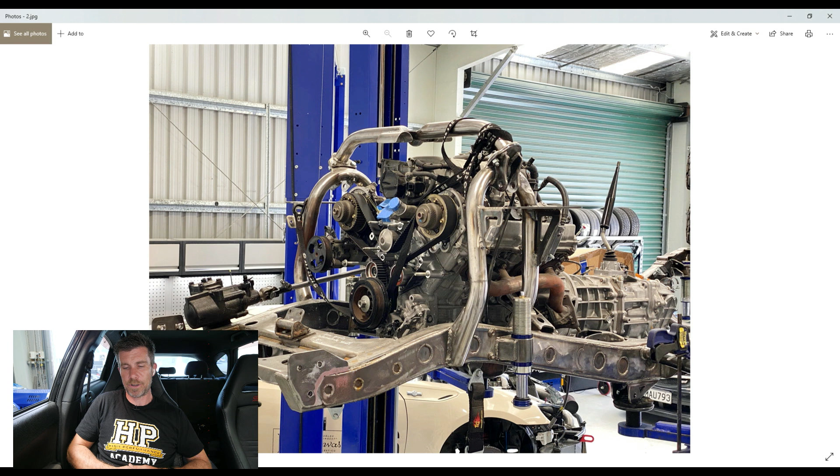As part of that, the upgrades include modernized suspension, including coilover suspension on all four corners, disc brakes, power steering, and also modernizing the powertrain with a Toyota 3UZFE 4.3 litre V8 and modern electronics. Now that's the car as it sits at the moment on our hoist. We were lucky enough to get Tom's Offroad, a little way up the road from us - they specialize, as Tom's name suggests, in off-road modifications and fabrication, and Tom did an amazing job on this truck with the fabrication work, including the coilover conversion front and rear. As you can see, we've got the 3UZFE sitting in the hole.

I'm not really after a huge amount of power for this truck - it is, after all, a cruiser - but the torque from the 4.3 is going to be a nice increase over the existing 3B diesel engine. The engine we sourced was from a wrecker, bit of an unknown entity, but it was in really good condition.

One of the things I always like to do when buying an engine from a wrecker of unknown origin is pop a rocker cover off - maybe two rocker covers in this instance - and take a look at what's underneath. That can be surprisingly telling in terms of the maintenance the engine has had over its life. Ideally, what we'd like to see under there is a nice tan honey color, which suggests regular oil changes and that it hasn't essentially been abused to within an inch of its life, which is exactly what we found.

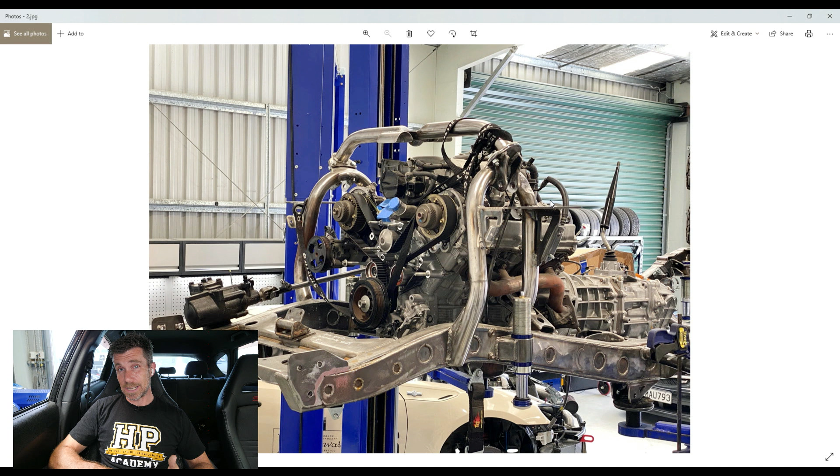If you want to get a little more involved, you can pop the sump and have a look there, and once you've got the sump off, it's not too difficult to pop maybe a big end bearing cap and a main bearing cap off. Actually, with the 3UZFE, the main bearing caps are a little trickier, but essentially that gives you the opportunity for a much more thorough investigation. Anyway, we found the engine was in really good condition, so it's just getting the basic maintenance items, including new cam belt, new water pump, new idlers, tensioner, etc.

Hopefully that way we shouldn't have to worry about maintenance on the engine for a fairly long time. Now, one of the things that a lot of people will do on a wrecking yard engine is perform a compression test, and that's normally pretty easy. All it requires is that you hook up the starter motor, even temporarily to a battery, turn the engine over, pull all the spark plugs, and put your compression tester in each of the cylinders one at a time.

Now, I just want to mention that in wrecking yard engines, this can be a bit of a mixed bag. While yes, it can obviously indicate a serious problem with the engine, particularly with engines that have sat in a wrecking yard for a long period of time, what we can end up getting is light corrosion forming on the valve seats and the valves that are open. While on face value that doesn't sound like the best, and obviously no corrosion would be perfect, it is a reality. This can be misleading when you do a compression test, because initially it may show low compression on a few cylinders, those that stopped with the valves open.

But the reality is when we actually fire the engine up for the first time and let it run for 10 to 15 minutes to get everything up to temperature, generally that's enough for the valves to wear back through that very light layer of corrosion that may have formed. They seat properly, and if you did a compression test after that, you'll probably find it's actually fine. So I don't have a great solution for that particular problem. I just want to mention that with this style of engine, a compression test can be a little misleading and may suggest a problem that, once it's fired up, is just going to be fine.

My suggestion is always to talk to the dealer or wrecking yard you're sourcing the engine from. Most of them will provide a startup warranty with an engine of this nature, so it allows you to have a bit of confidence when you're buying something that's a bit of an unknown quantity.

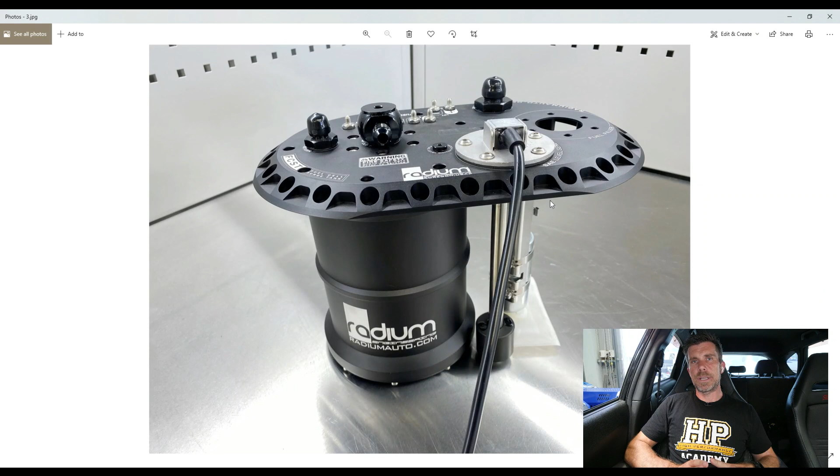All right, so what we're doing with the vehicle now, we'll just jump back across to my laptop screen. We are in the process of designing and building a fuel tank or fuel cell for it. This was a diesel vehicle and it's not going to be diesel anymore. It's petrol and it's EFI, which requires a constant high pressure supply of fuel.

So what we did is we sourced this Radium surge tank system. It's actually designed more for race cars, and it fits a universal style mounting flange, this kind of oval flange that we can see up here. We see this in a lot of professional fuel cells, so this just bolts straight in.

A nice feature with it is that it provides a surge tank as well as a pickup—a little hard to see here, but this is the lift pump. This just pulls fuel from the cell and pumps it internally into this fuel surge tank here, which I think is around 2.5 to 3 litres in capacity, so reasonable size, a little under a gallon.

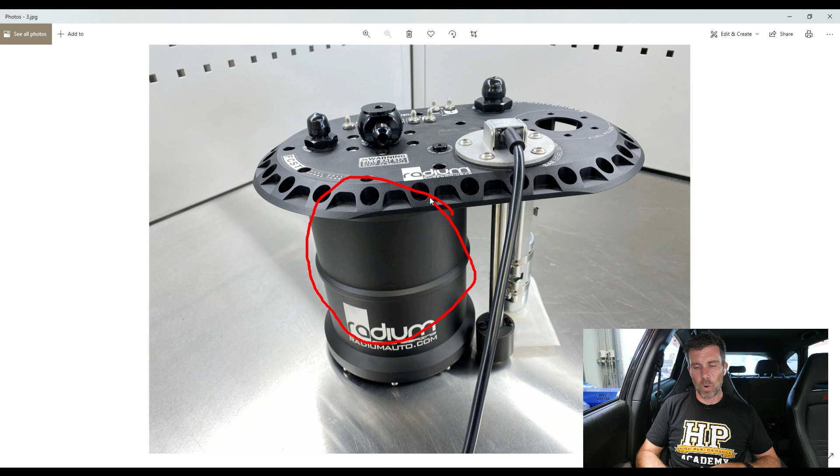And then inside of the surge tank we've got the ability to run, I think 1, 2 or maybe even 3 high pressure main pumps. Obviously we're not making a lot of power with this thing, so one is absolutely more than we need. On top of that, because it's a road car, I'd like to know what the fuel level is, so we've got a fuel level sender there as well. That's the basis of the fuel tank.

On top of that, Brandon's pretty handy with Fusion 360, so he designed up a bit of a mock-up of what the fuel tank needs to look like. We've got a fairly tight space that it will fit in, so we needed to work around that.

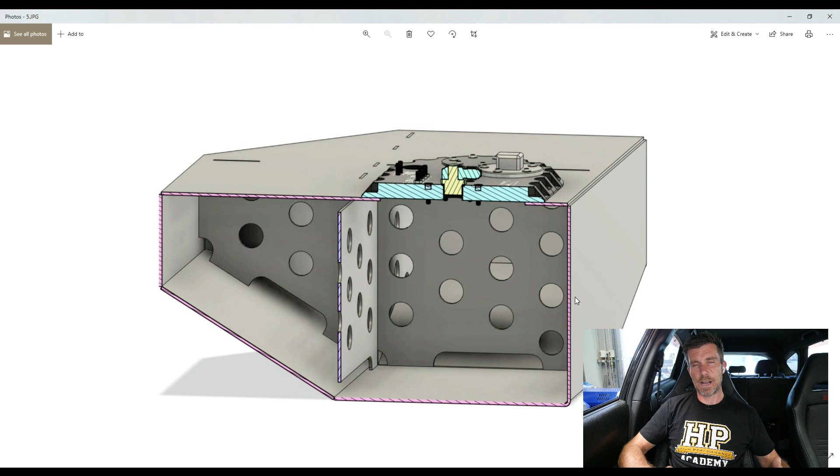So essentially from that Fusion 360 model, the team were able to cut out cardboard in the shape of each of those components, tape it up together and give us a real world idea of whether that was going to fit the space, and a sense of what that was going to look like in the location, including the clearance to all of the items around it.

I will come back to what we are doing with this particular project in a moment, because it is relevant to a brand new course that we've produced and are about to release.

On top of that, I have been waiting for MoTeC to catch up with their supply chain issues and provide us with a bit of product so we can get on to the next exciting stage, which is the electronics upgrade and the wiring harness build and installation. I'll just show you a couple of the main components.

Definitely not essential, but given the quality of the build we're doing here, I really thought it warranted producing a proper professional motorsport harness using Autosport connectors. Everything's going to be sealed, booted, DR25, the works, as you'd probably expect for something at a professional level.

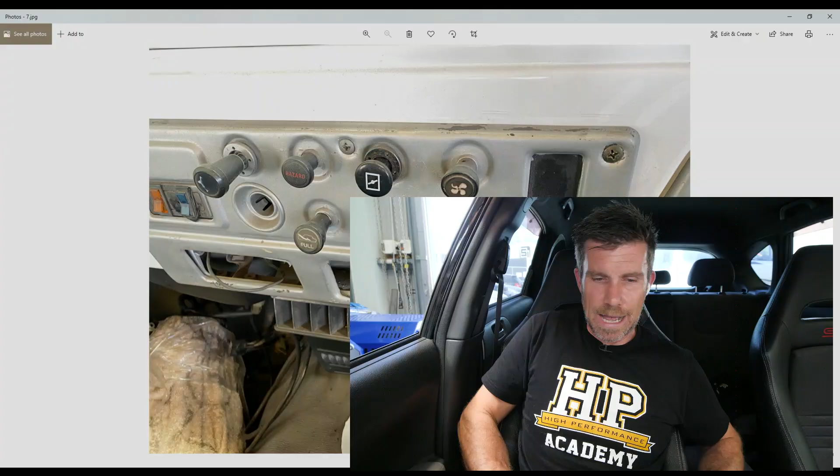Now, when it comes to the FJ40, I am trying to keep some originality in here though. If we jump across to my laptop screen, we can see - while it's going to be a little bit cleaner than what we've got here - the switch gear that is on the dash.

And these are sort of pull switches, and I want to retain these, although they'll be a little bit sharper than that when we're finished, I hope. But basically we'll be wiring these as wired digital inputs to the PDM in order to control those.

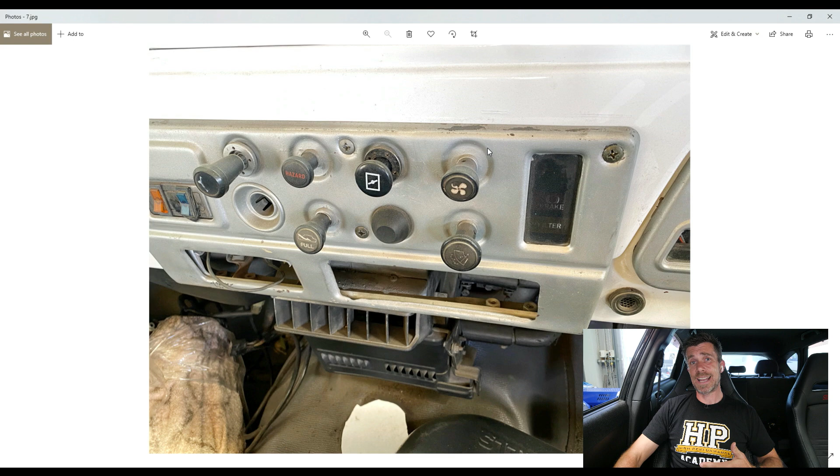Now, I know a lot of people getting involved in their project cars are maybe put off the idea of running a power distribution module, and yes, it will cost you a little bit more money. But some of the entry-level PDMs now are incredibly affordable, and all things considered, it's probably only going to cost maybe a few hundred dollars more to add a PDM when you're considering a complete fresh start wiring harness. So it's definitely worth considering for the potential upsides, the amount of flexibility and advantages they offer.

And what's really easy to overlook is that introducing a PDM into your project can actually end up saving you money, particularly if you're paying a professional to wire up your car, because you'll save on all the time required to wire up fuses, relays and switches, which is incredibly time consuming.

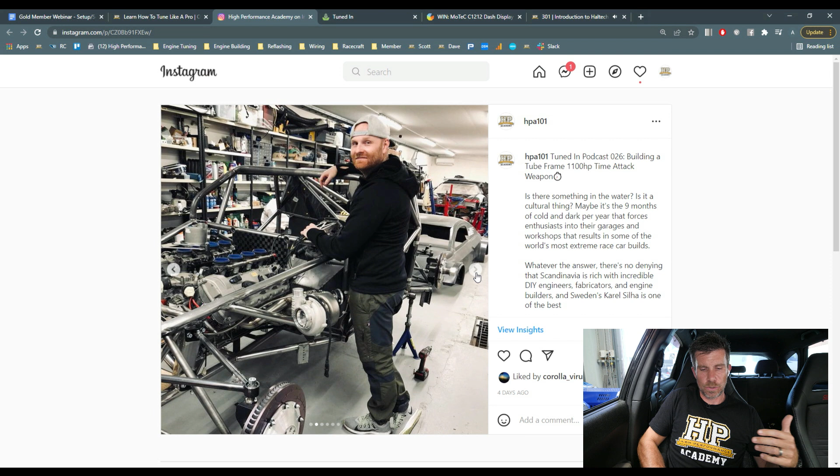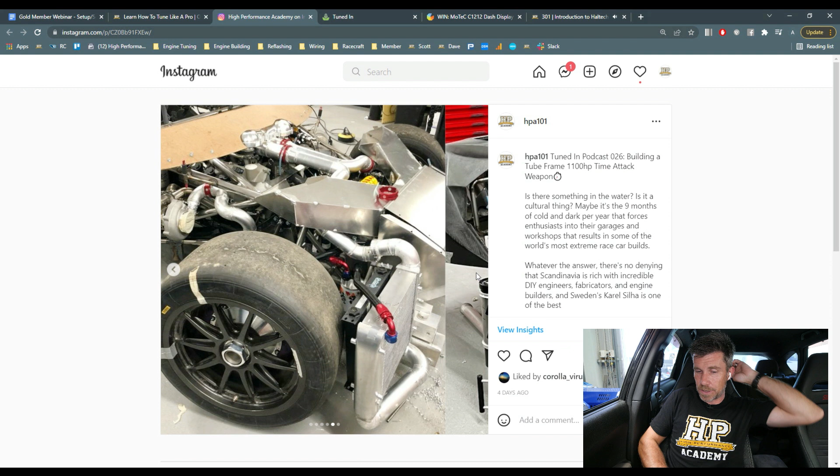If we jump across to my laptop screen to our Instagram, this covers our most recent podcast release on the HPA Tuned In podcast. I got the opportunity to speak with Karel from Karel's Motorsport, from Sweden, who is building this insane fully tube framed 1100 horsepower BMW M4, essentially a DTM car on acid. It's absolutely incredible - we talk about the design and development of this car, particularly the aero development and how he designed and built the full carbon fiber body. An interesting anecdote: the body was actually constructed based on a 1/16th scale model that was 3D scanned and then scaled up in 3D modeling software - a unique option I wouldn't have considered. If you want to find out more about what makes this car tick, and hopefully it's not too far from hitting the track, check out the HPA Tuned In podcast.